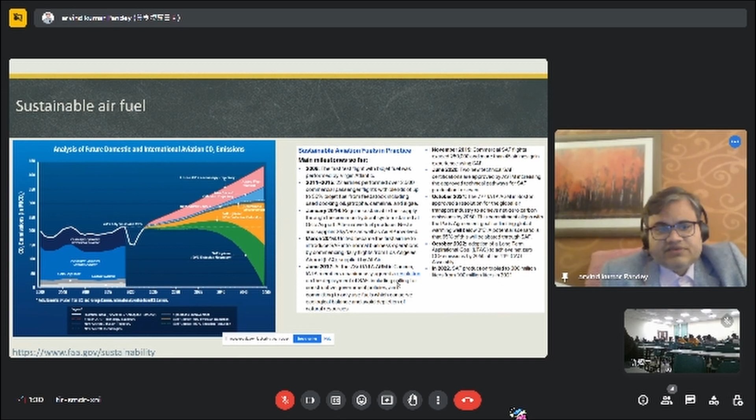This is a big challenge. We cannot do that immediately, and that drives the innovation and advancement in the aerospace industry. I'm presenting one graph, and I will show a zoomed view of it, because this is key to all the innovation currently happening in the aerospace industry.

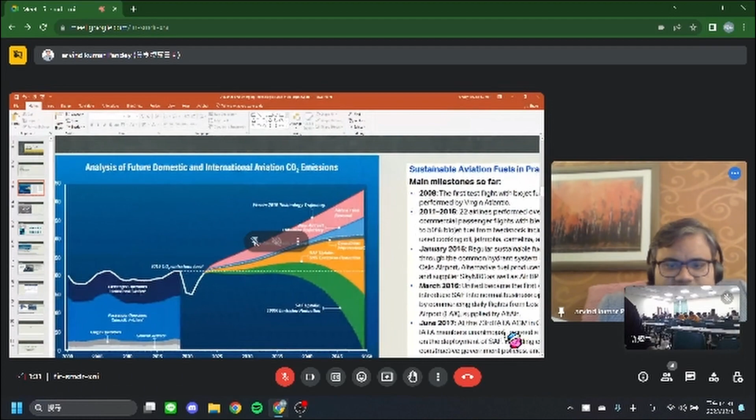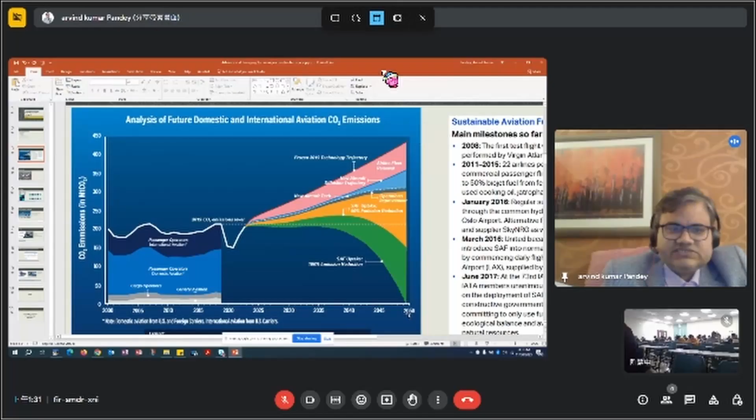So let's see, this graph is developed over the years on the horizontal axis, and the vertical axis shows CO2, carbon dioxide emission in metric tons. And if we see the trend from 2000 to 2019, almost 200 million metric tons of CO2 emission we are doing every year on an average.

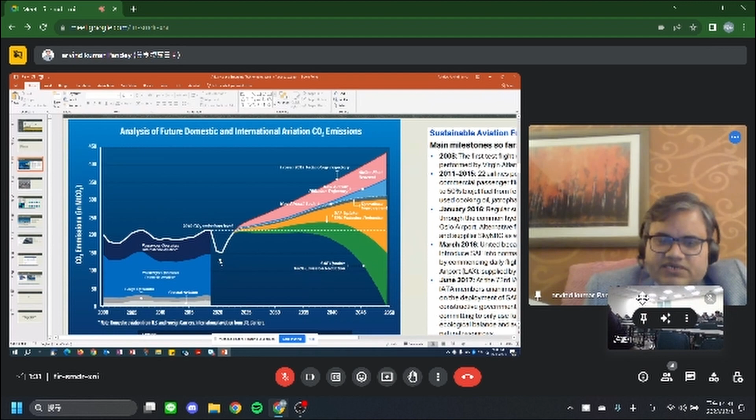But after 2019, there is a curve that deeply goes down. The reason behind is that Corona came, and for that reason airlines were not operating. If you see in this curve, a very interesting fact is, when the curve starts from here in 2023...

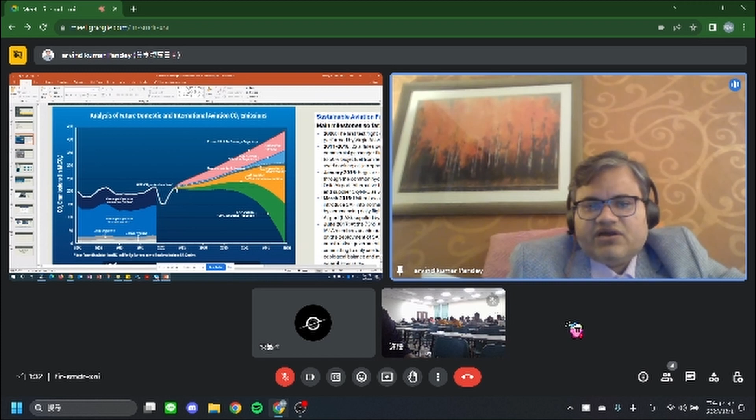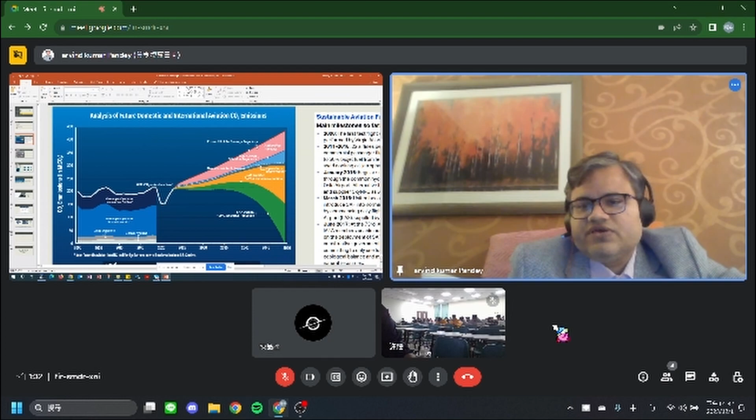...we are almost able to gain back the aviation industry to the same level as 2019. And if we are not doing any new innovation in the aerospace industry, if we are not bringing any new product, then how much CO2 emission will we be doing? The red graph shows the trend that over to 2050, if we do not advance our technology, if we do not innovate, then the carbon dioxide emission will almost be doubling by 2050. So how do we bring this down?

Everyone is thinking we have to protect our ozone layer, we have to save humanity by protecting the ozone layer. How can we do that? We have to stop generating CO2. And how can we stop CO2? Because the aviation industry is heavily generating CO2 because of their engines - they are flying, the engine is running, they are burning fuel, and CO2 is coming into the atmosphere. The best thing is either we can replace the fuel to reduce the CO2, or we can change the technology. The current industry is working on both ways.

They are also working to develop new fuel, adopt new fuel, adopt new technology, and change the design of the aircraft. When we think about the aircraft, if we close our eyes and just imagine what an aircraft is, only two concepts come in general - either fighter or passenger. Passenger aircraft also has a very conventional shape - a cylindrical body, two wings, landing gear, tires - and the fighter aircraft has a very stealth kind of structure, a pilot seat, very high velocity.

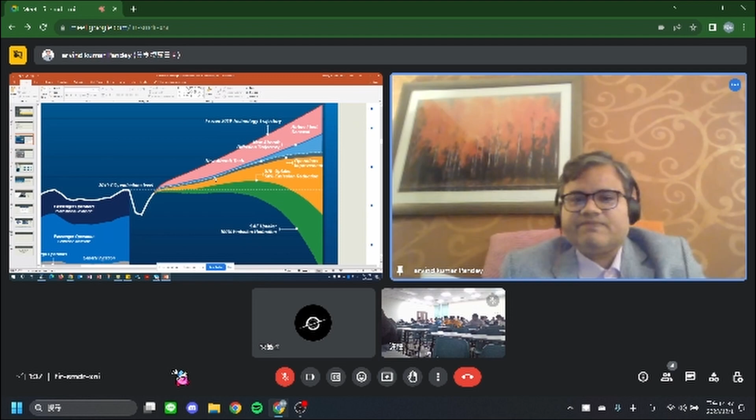A very key important point I will be sharing from here. There is a term called net zero carbon emission by 2050. In October 2021, in the 77th IATA AGM in Boston City, IATA approved that the industry has to achieve net carbon zero emission by 2050. And this commitment is well aligned with the Paris Agreement goal for limiting global warming to well below 2 degrees centigrade.

So 65% of this will be abated through sustainable air fuel only. So what is this sustainable air fuel? This is a biojet fuel. All the airline companies are adopting it.

In October 22, a long-term aspirational goal to achieve net zero CO2 emissions by 2050 was decided at the 41st ICAO assembly. SAF production tripled to 300 million liters from 100 million liters in 2021. This shows the demand for sustainable air fuel and for changing the technology. Within 1 year, we have adopted many new technologies, changed many old parts with new technology parts, changed our fuel, and achieved this much.

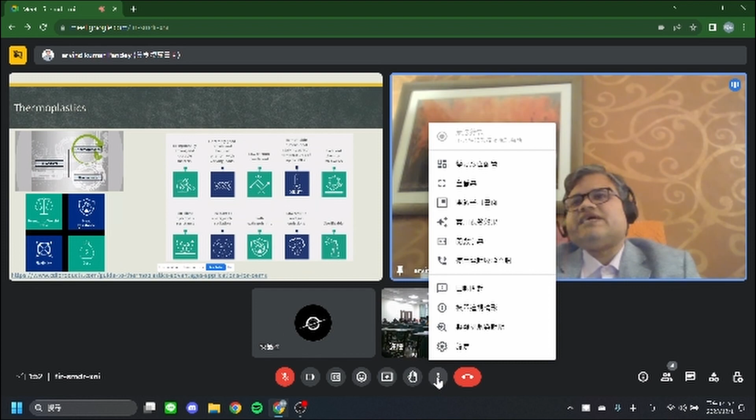So this is a wastage of time, where we are not utilizing all the resources properly. So the industry thought we will not use composite this way. We have to come out with this technology for the curing of the composite. So then this thermoplastic has come. It doesn't need any curing in the oven, it doesn't have any lean period.

So what will happen with that? The production rate will increase. If we see Airbus and Boeing, mostly every 6 months or 3 months we'll be reading news that these many aircrafts are in the backlog, and they are in tremendous pressure to deliver more and more aircraft. How can they speed up if their manufacturing is not speeding up? If no new technology is coming, so this is the answer for them. They got this help with using thermoplastic. They'll be able to speed up their manufacturing, and they will be able to deliver more and more aircraft.

A very good point is here: extremely good tensile and flexural strength with varying load. This is just a few lines, but it has very deep meaning in the aerospace industry. Extremely good in tensile - just think of a pressure vessel, a cylindrical body. When you apply a hoop stress, what happens? What kind of stresses does it develop? Mostly shear, tensile shear, and sometimes if it's enough length, some bending will happen.

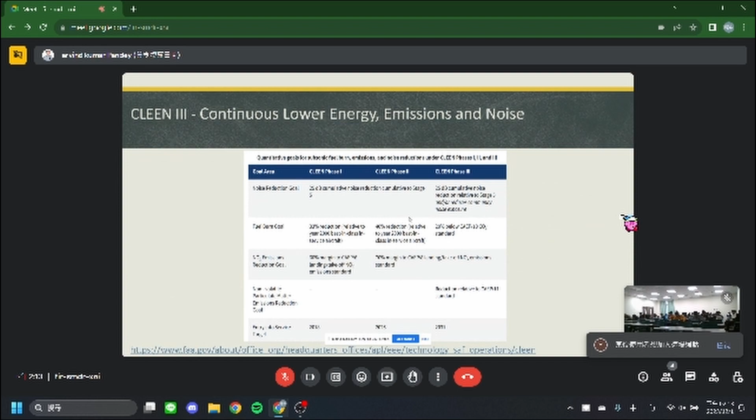In CLEEN Phase I and CLEEN Phase II, you might have heard of the high bypass ratio engine. There are jet engines, there are propeller engines. What happens here is they identify all those engines which can reduce noise level and emissions. One example is the ultra high bypass ratio engine.

As you might have studied or may study soon, in the conventional jet aircraft, when air comes in, this is called the intake or inlet—we say inlet cowl in the aerospace industry. It's a very big duct; airflow has to come inside. When the airflow comes, it passes through the fan blades, compresses, and goes to the compressor. Then fuel burns in the engine and goes to the turbine.

Only some air goes into the engine, but the rest of the air bypasses from the top, above the engine. You can see that brown color and the gray color—gray is the engine shape, and between the gray shape and the top you see blue. In between, whatever space you see, the fan is big shape, and there the bypass airflow goes.

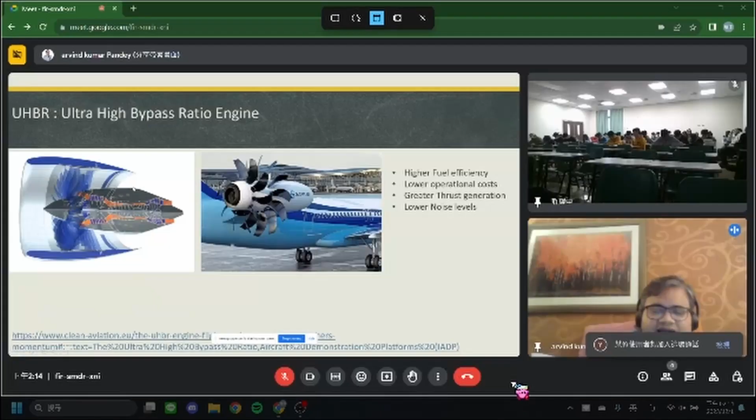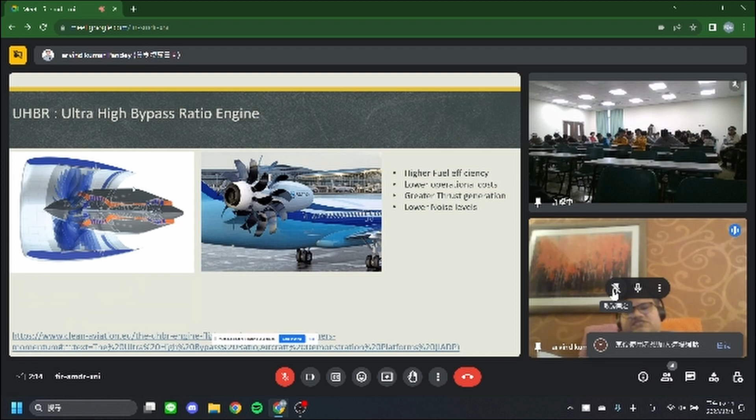When high bypass is happening, what is the current trend ratio? Current trend is 8 is to 1, or 10 is to 1 bypass. So what is the limitation? If I increase the bypass, my engine will be more efficient. So why can't I simply increase my bypass? There's a limitation of the cowling and shape, and how that structure has to fix with these engines—there's a limitation in the design.

So the industry thought, let's come out with something—what we'll do is not use any cowling. In figure 1, left hand side, you'll see there is a cowling. But in figure 2, the Safran engine, you won't see any cowling. What it does is have a fan behind the engine that rotates and sucks air from the atmosphere—virtually treating the atmosphere itself as a duct. This technology considers the atmosphere as a duct, and sucks air with a high flow rate, improving the bypass.

So there's the answer—okay, I got the answer, I can improve my bypass by considering the atmosphere. But this is not the only solution. There are many other challenges happening which industry is dealing with now.

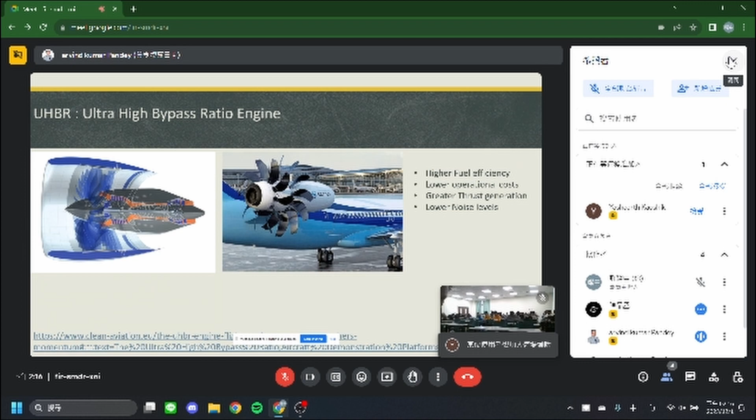The major challenge in this ultra high bypass ratio engine is the location—where to fit it. Air comes from the wing leading edge and goes toward the wing trailing edge, and further aft to the fuselage body, and the aircraft elevator and rudder side. Conventional single aisle narrow body commercial aircraft, which we see in day to day life or when traveling, have the engine on the wings.

If I have to use a very high fan blade design—the fan blades, you can see, very big—then I cannot keep this engine beneath the wings, because if the fan blade is high and rotates, there are chances the wing design may limit it. If we keep it sufficiently forward from the wing, then there's a chance of instability of the fuselage. The pitch nose up and nose down moment may not be controlled well, and to control that we need to add weight at the aft side to counterbalance that pitching moment of the aircraft.

The 737 Max incident, the aircraft crash—many of you might have studied or read about it in the newspaper. A similar thing may happen: if we keep the engine further forward or much away from the wing bottom, design stability problems will come, aerodynamic stability problems will come in the design.

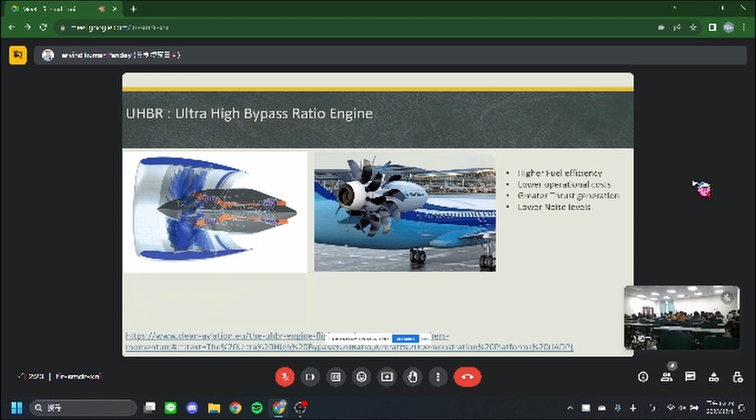So the objective of this presentation, and sharing this industry knowledge, is: do not study just to pass. Ask the right questions. Many times it may happen that you may not find your answer directly in your organization. There are ample sources in open forums and with industry experts. Connect with them and keep learning.

And at the same time, it's not only you who'll be learning. With those industry people, from your question, sometimes they also get ideas. They also learn from you. It's both ways. Someone has asked questions, and then I learned something from his question because I was trying to find out the answer. While finding the answer, I learned and then implemented it in my work.